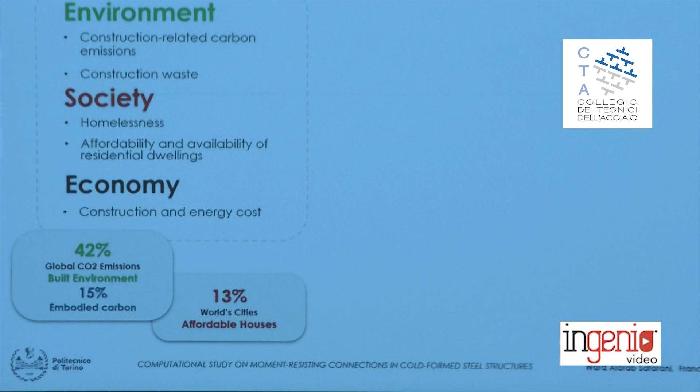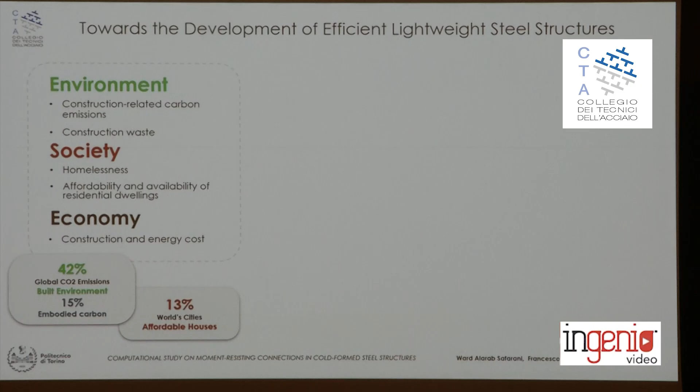As you may know, there is a high demand for efficient and sustainable structures to help cope with global environmental, social, and economic problems. For this reason, lightweight steel framing and modular construction, as cold-formed steel applications, are increasing in these days.

The most common structural systems used in this application are cold-formed steel braced frames and moment-resisting cold-formed steel frames. However, the structural performance of braced frame systems is limited compared to moment-resisting systems, since it's good for low to mid-rise buildings, while cold-formed steel moment-resisting systems are a brand new topic for the development of lateral load resisting systems suitable for high-rise buildings.

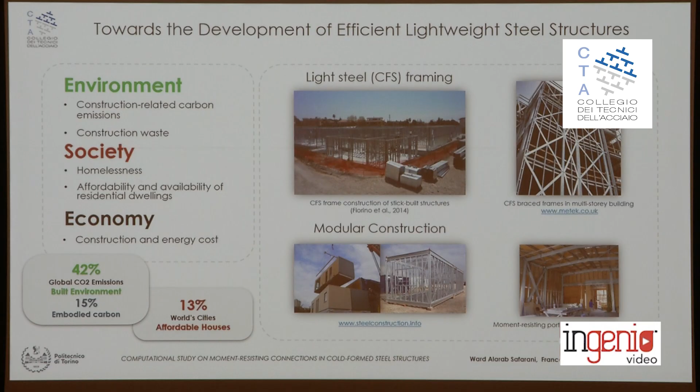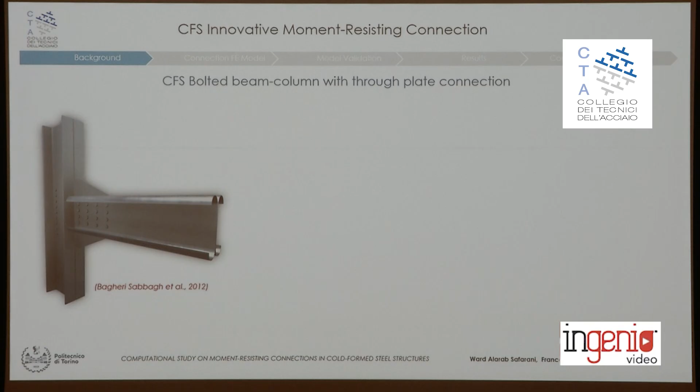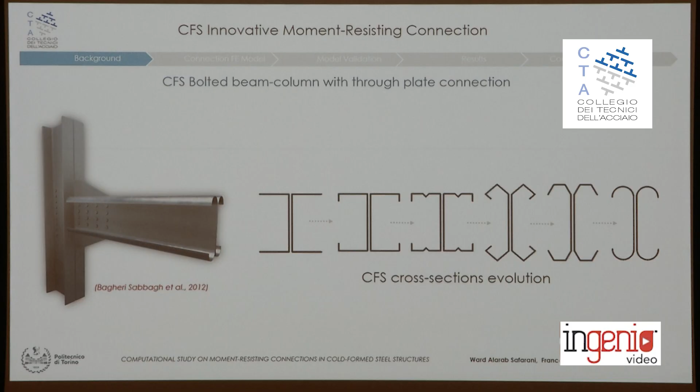I'm going to briefly introduce the background of our study. Here on the left side, you can see one of the most interesting advancements in the field of cold-formed steel moment-resisting systems: a beam-column connection using a curved flange beam section. It was found that by increasing the bends on the beam section flanges, we can improve and enhance the elastic and inelastic characteristics of the joint, thus delaying local buckling and achieving higher stiffness, strength, and ductility.

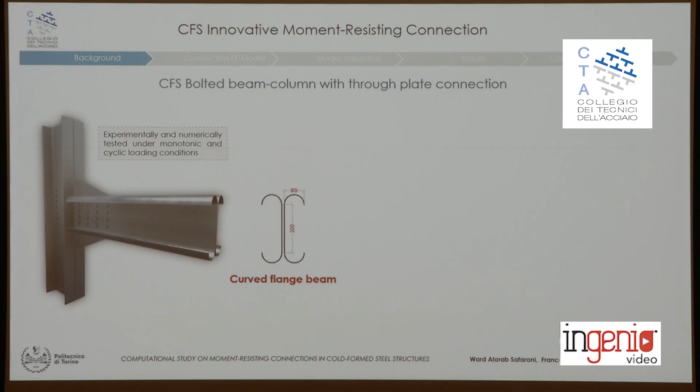This connection was tested experimentally and numerically under both monotonic and cyclic loading. However, it might be difficult to manufacture, and it might be difficult to place the flooring system. For this reason, as you can see on the right, an alternative section, the folded flange beam section, was proposed to overcome these restrictions.

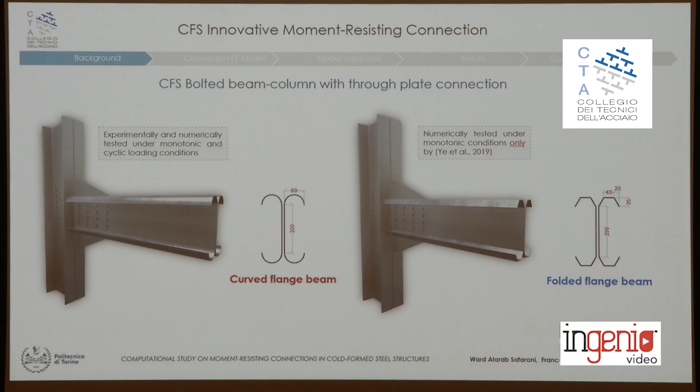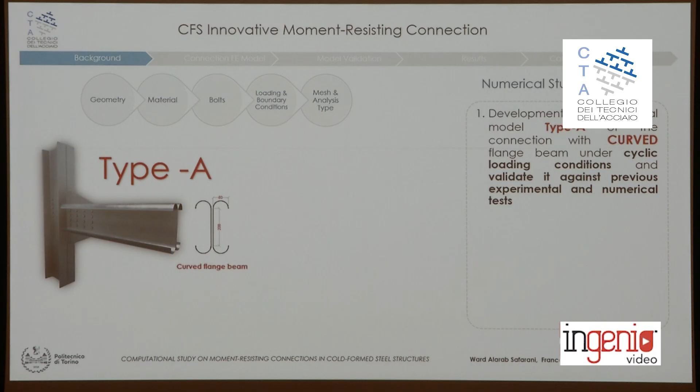In our study, our aim is to study this connection with the folded flange beam section under cyclic loading conditions. For this reason, we built our numerical model starting from the beam-column connection with curved flange beam section, which we called Type A, shown in red. We validated our results against previous numerical and experimental research.

Then we built our model with the folded flange beam section, which we called Type F, shown in blue, and we studied this connection under cyclic loading conditions. We evaluated the performance of this connection in comparison with the connection using the curved flange beam section.

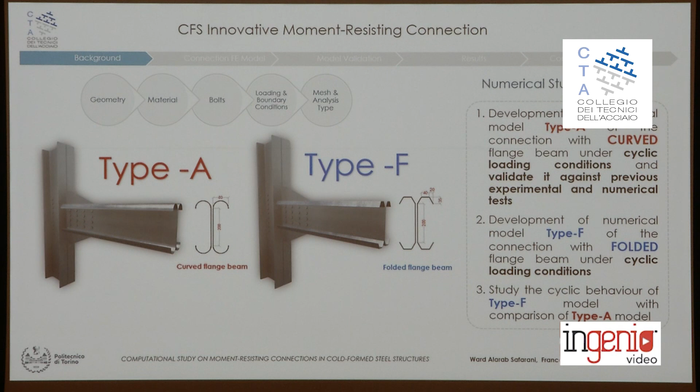The modeling has been carried out using Abaqus software. The modeling steps include geometry, material, bolts, loading boundary conditions, mesh analysis, and the type of analysis. I'm going to guide you through the whole modeling process in the following slides.

Starting from the geometry, on the top left side of the slide, we can see the general specification of these numerical models. In general, we have two main types of models: Type A and Type F. Type A uses a curved flange beam section, while Type F uses a folded flange cross section.

For each type of model, we have three different configurations of stiffeners: the first without any stiffening at the connection zone, the second with partial stiffening in the connection zone, and the third with both horizontal and vertical stiffeners at the connection zone.

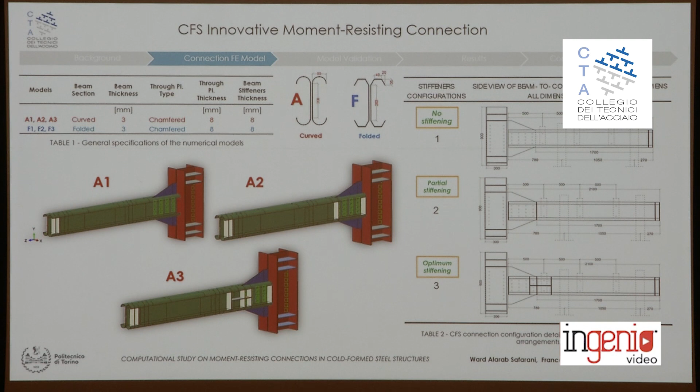You can see here on the bottom left side a 3D representation of the Type A model, and here is the 3D representation of the F models, including the through-plate dimensions and bolt arrangement.

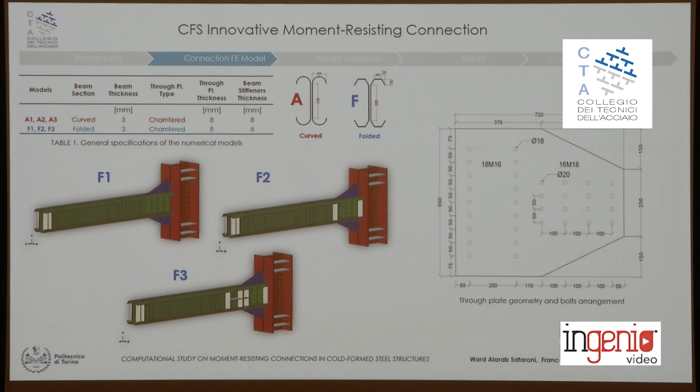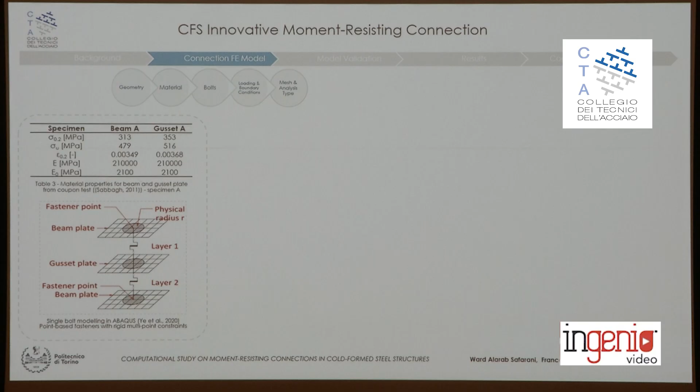Now we move to material. A nonlinear, elastic-plastic stress-strain material law was incorporated into Abaqus using experimental data from coupon tests conducted in a previous experimental study. The bolts were modeled as point-based fasteners with rigid multi-point constraints.

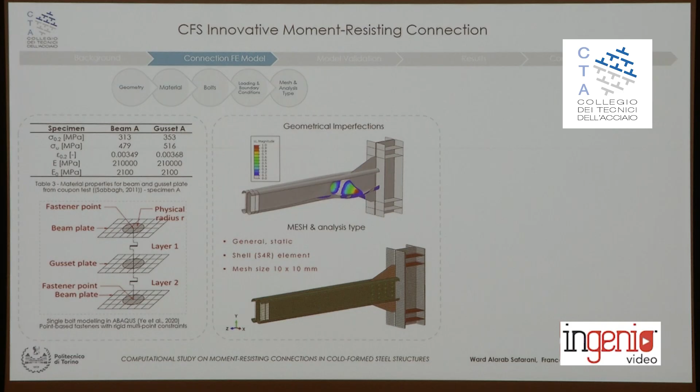Geometrical imperfection has been considered in the model. The analysis type was general static, using shell quadrilateral elements with a mesh size of 10 by 10.

On the top right, you can see the loading and boundary conditions. The loading was applied by imposing a displacement at the tip of the beam using the cyclic loading protocol, as shown on the bottom side of the slide.

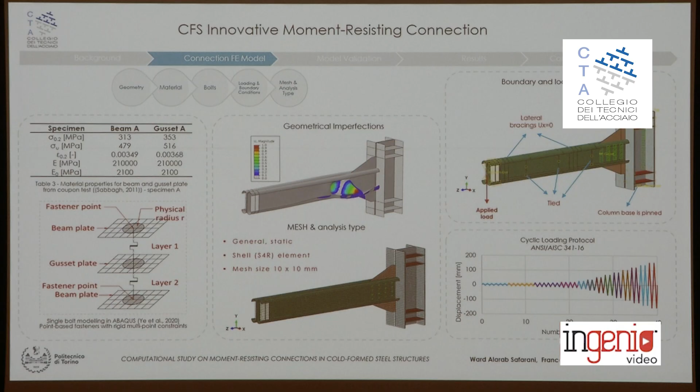Now we can move to model validation. The model validation was carried out on type A models. In these graphs, we can see the moment-rotation curves.

Our results for this model are represented by the green line, while the red line is the previous numerical results, and the blue dotted line is the previous experimental results.

We can notice that our results fit well with the previous numerical results, while there is a slight discrepancy in specimen A2 with respect to the previous experimental results. This calls for experimental investigation to understand this discrepancy, and I'm going to comment on this at the end of the presentation.

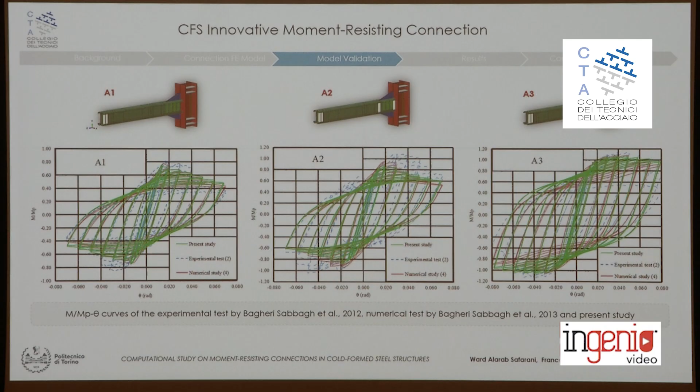After that, we can now discuss our results for the model with type F, taking into account failure shape, strength, and seismic behavior of this connection. Starting with the failure shape here.

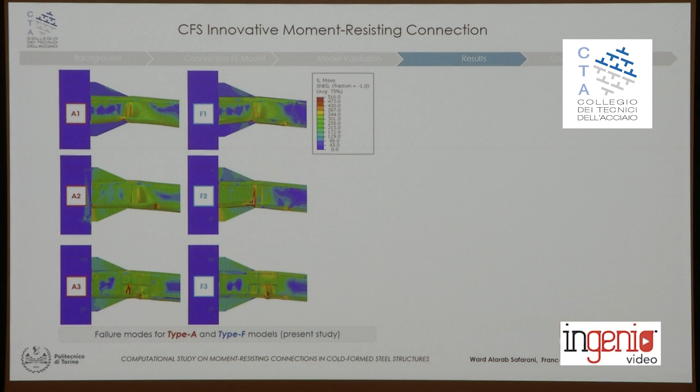Here you can see the failure shape extracted from Abaqus. If we do a comparison, the yellow circles show that F1 and F2 models have similar behavior to A1 and A2, and the failure occurred in the web location at the edge of the gusset plate.

However, for F3 and A3, the buckling was delayed, and the failure occurred on the flanges outside the connection zone.

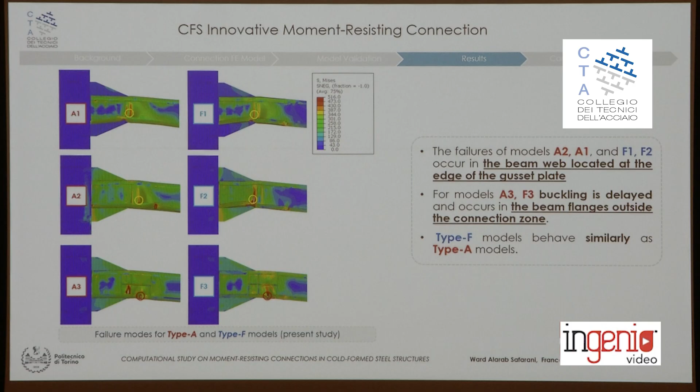Moving to the strength discussion, we extracted the moment-rotation curves for all models. We can see that for F1 and F3, the strength degradation due to cyclic action is slightly higher than A1 and A3, while the contrary is true for F2 and A2.

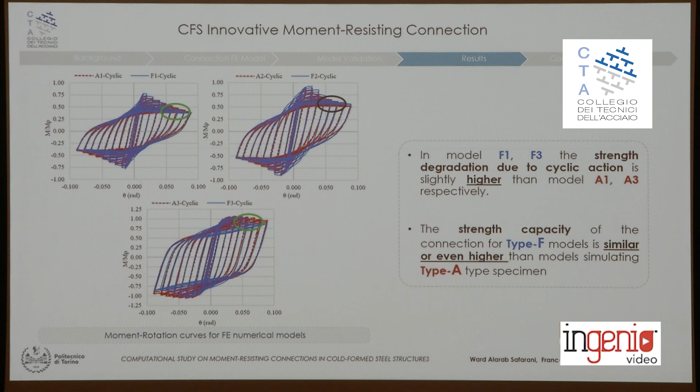In general, we can see that the capacity of type F models is almost similar to type A models.

The last step is the seismic behavior study of this connection, but I'll briefly guide you through the procedure. First, for each cyclic curve, we extracted the backbone curve and identified four points: A, B, C, and D — A for yielding, B the peak, C ultimate, and D the failure point.

Then we bilinearized the backbone curve, and at the end we could compute ductility and energy dissipation capacity. Ductility is the ratio between ultimate rotation and yielding rotation, while energy dissipation is the area under the bilinearized curve.

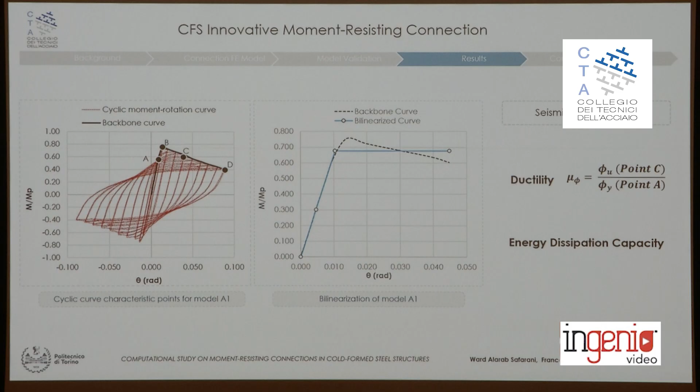Here you can see a comparison between type A models and type F models in terms of ductility and energy dissipation capacity. We noticed a slight difference between the two connections, and in general the seismic behavior of type F models is similar to type A models.

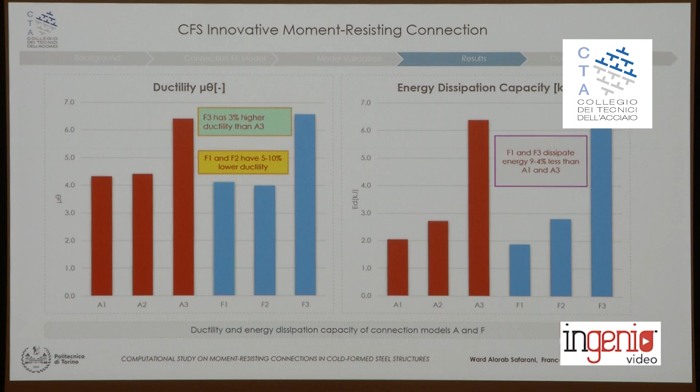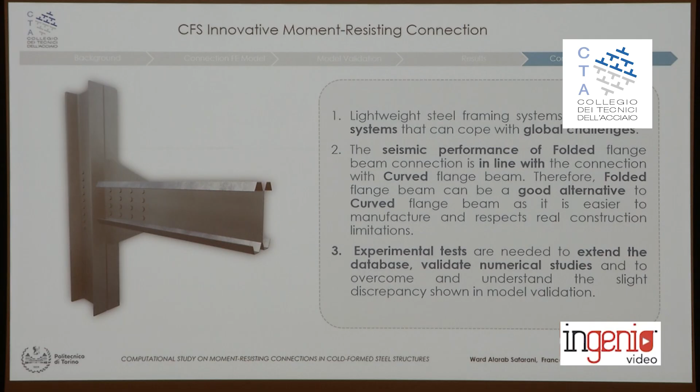This leads us to the conclusion that lightweight steel framing is an efficient system that can help overcome global challenges. This connection with folded flange beam section can be a good alternative to the connection with curved flange beam section, as it has similar behavior in terms of strength and seismic performance, while overcoming constraints in practical practice and manufacturing.

At the end, experimental tests are needed to further investigate this kind of connection and extend our database. Here at Politecnico di Torino, we are planning an experimental campaign to further contribute in this field.